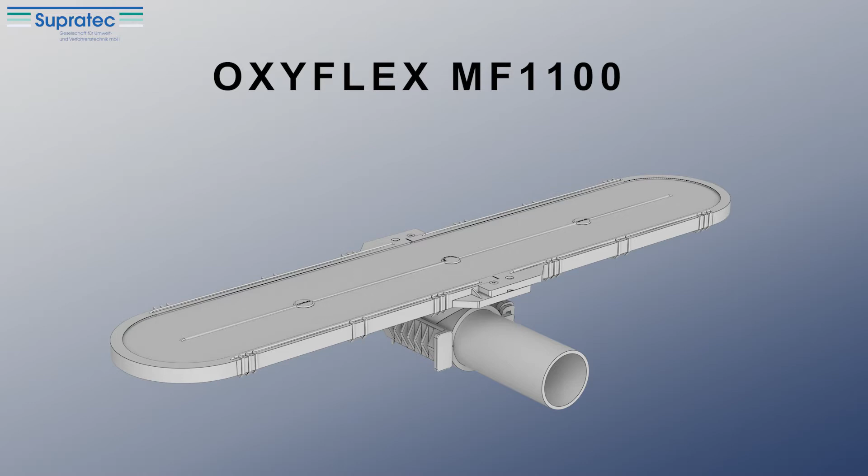OXYFLEX MF1100 is a membrane diffuser with diverse specifications and installation options. The extraordinary specifications and well-known reliability define standards in modern aeration technology. Therefore, the OXYFLEX MF1100 is the best-selling diffuser within the Supratec product range.

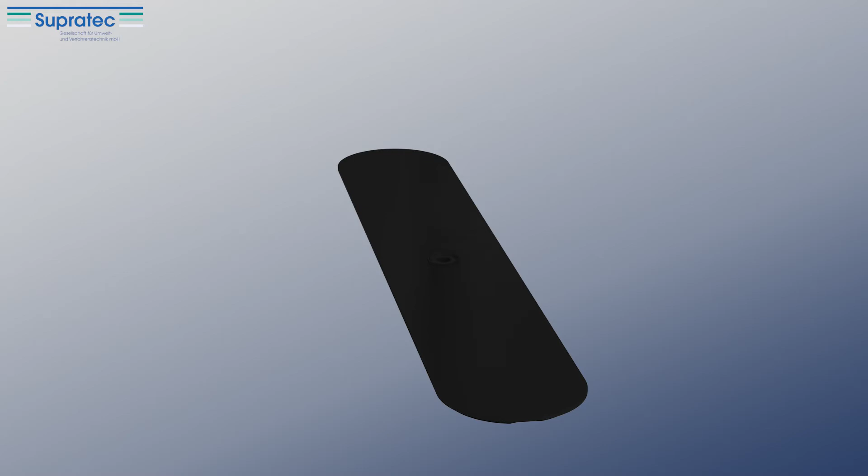The base plate, made out of fiberglass reinforced polypropylene, is completely enclosed by a special molded membrane, hereby ensuring a reliable and durable sealing. EPDM membranes and polyurethane membranes are both available. These different membrane materials, as well as the perforation, can be adapted to meet the project-specific requirements.

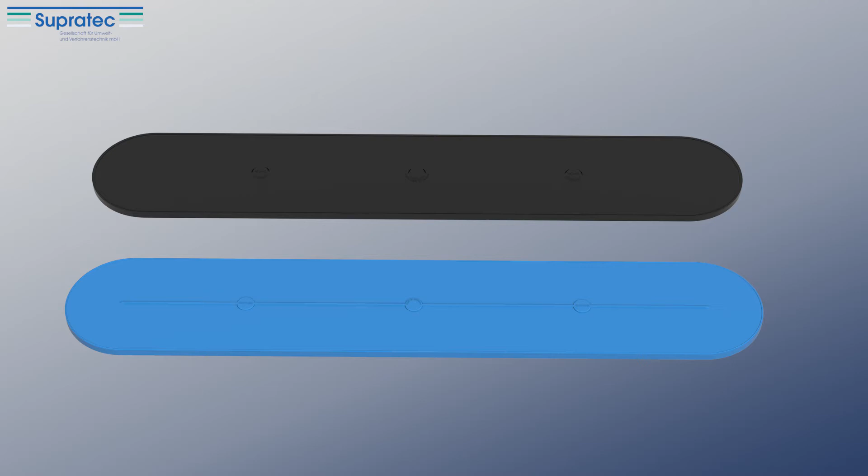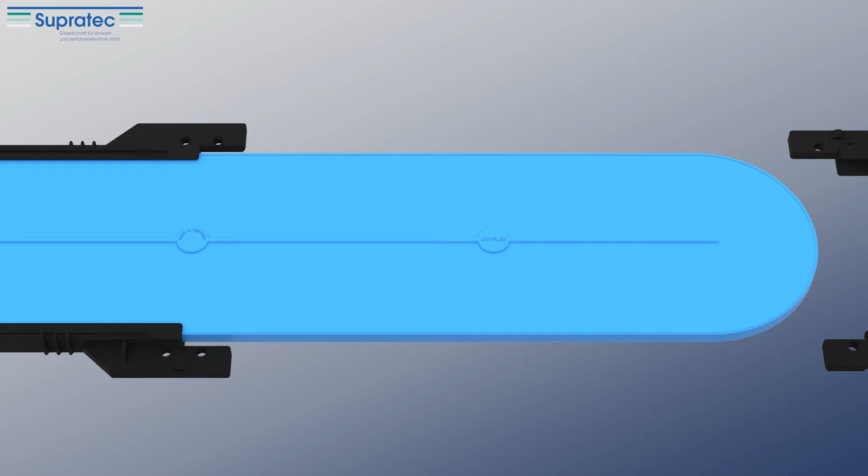The two-piece frame consists also of fiberglass reinforced polypropylene and is merged together by sliding from both sides. In the final position, the two frames snap together, ensuring a safe connection. OXYFLEX MF1100 Type B is installed directly on rectangular pipe with welded stud bolts.

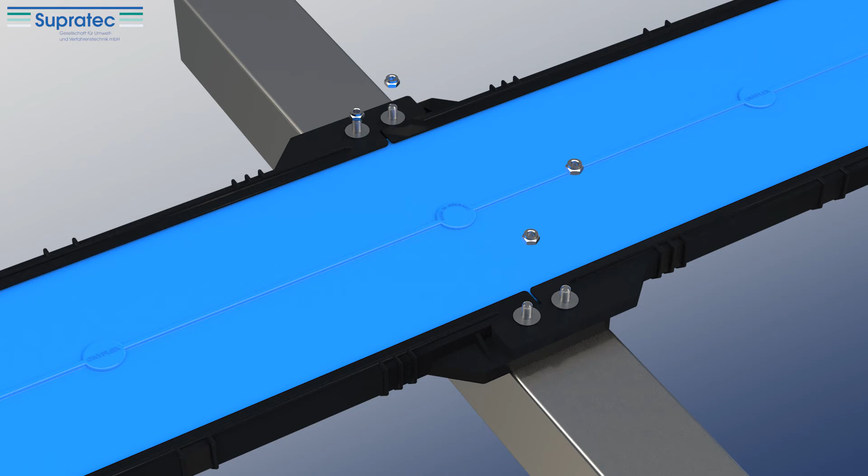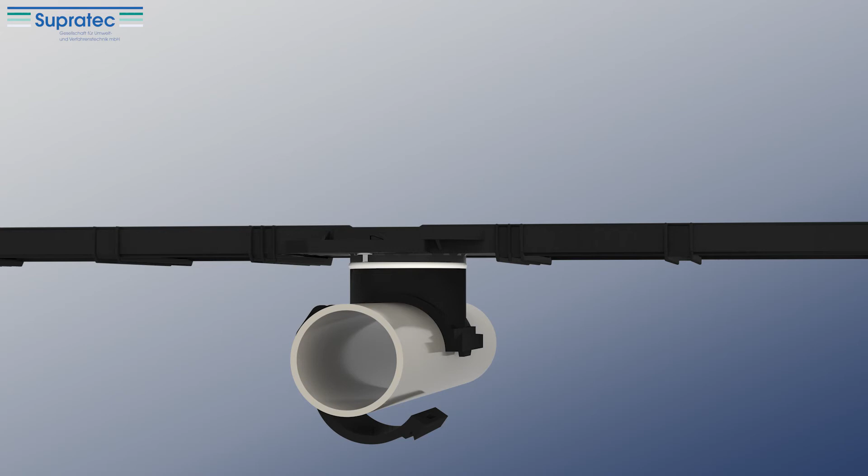In version AS, the diffuser is supplied with factory-welded clamp saddle for installation on round pipes. The clamp saddles are available in different versions and can be selected for different pipe outer diameters depending on project requirements.

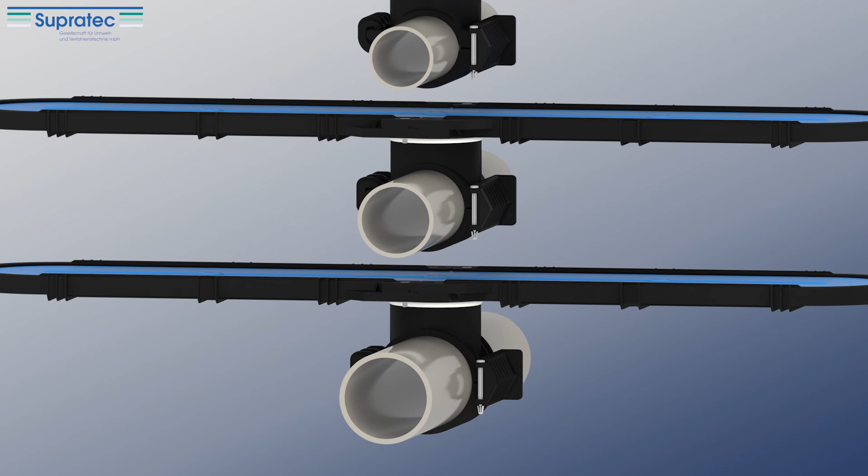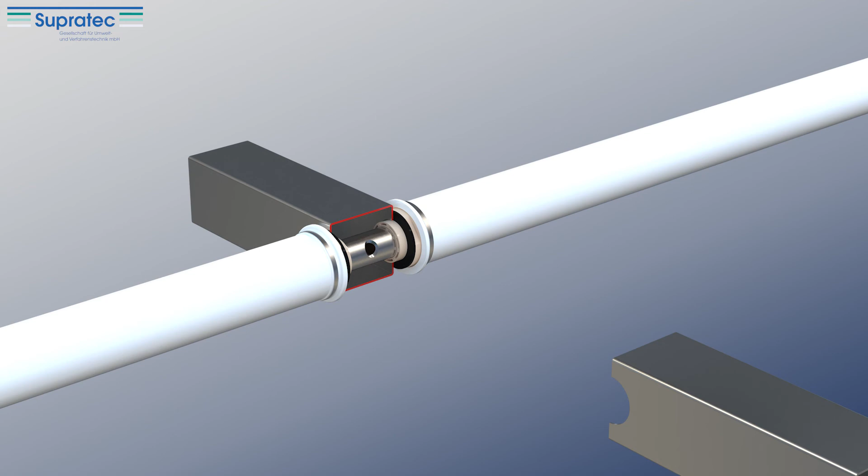For an easy and quick modernization of existing tube diffuser systems with lateral boreholes, OXYFLEX MF1100 with included lateral adapter version SA can be used directly without any further required adaptations on site.